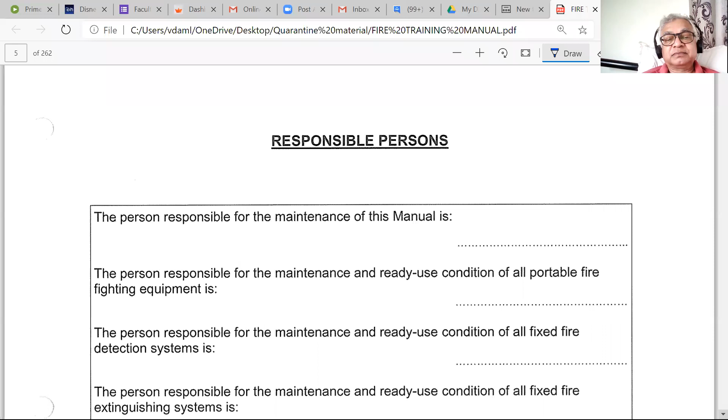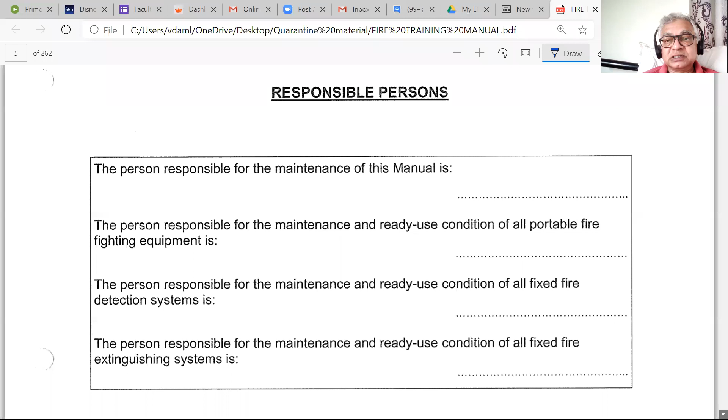Then there is a list of responsible persons. Here you see responsible person for maintenance of manual, then portable firefighting equipment, detectors, or fire extinguishing system, etc. So the responsible person's name must be mentioned clearly. Now don't worry about acknowledgements, that is not normally the person.

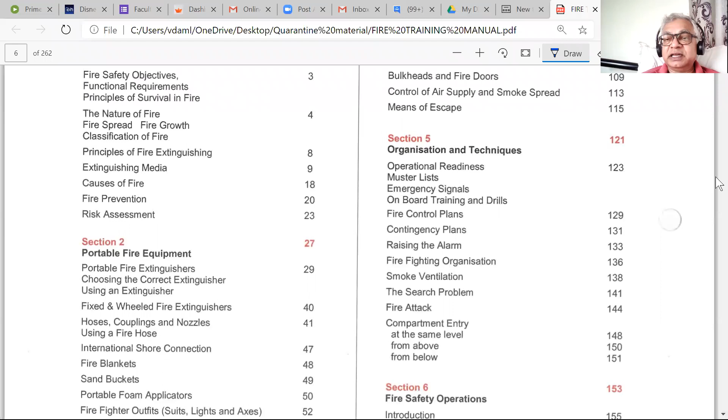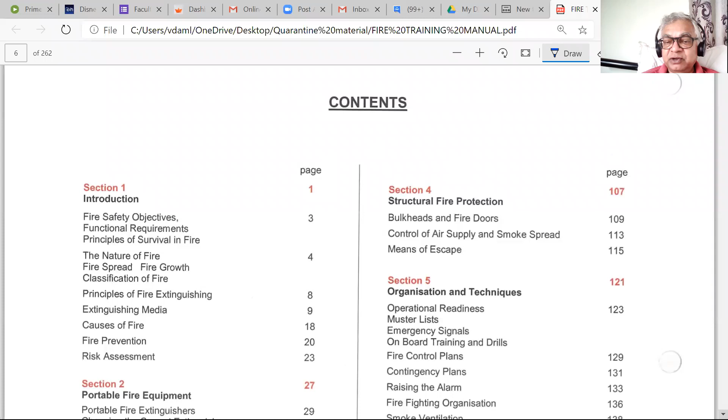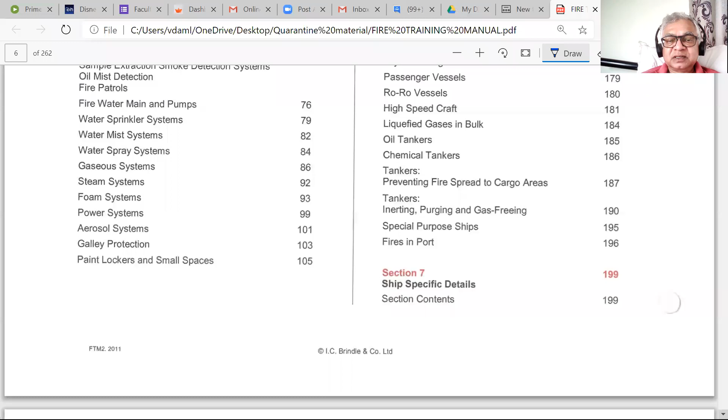Then you have got this index, what we can see here. Contents: section 1, 2, 3, 4, 5, 6. Now this particular manual covers everything quite well. So if you study this carefully, you should be covered around 70%. And then more than that, you have to obviously do a little bit more.

Now the purpose of this manual is to provide all members of the crew with general and ship specific information, instructions in firefighting, meaning of the ship's alarms, operation, use of firefighting systems, etc.

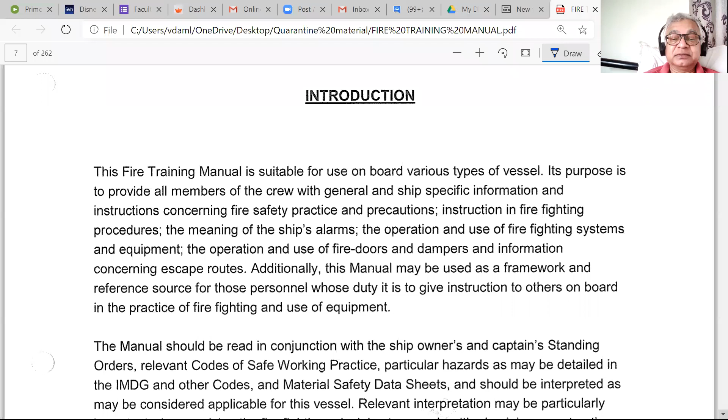Now, this manual is always read in conjunction with ship owner's or captain's standing orders. Normally it will be captain's standing orders, the ship owner thing normally they don't directly involve themselves. So you will have captain's standing orders, then relevant codes of safe working practices, etc. So this is not the only thing to close the chapter, this is one part of the system.

You need to also refer to other books, like material safety data sheets. Now obviously, when you are going to deal with some chemicals, you have to read this. So this is not only for safety, but we are also looking at when you are replacing chemicals, say foam chemicals or something else, all that time you need to refer to it.

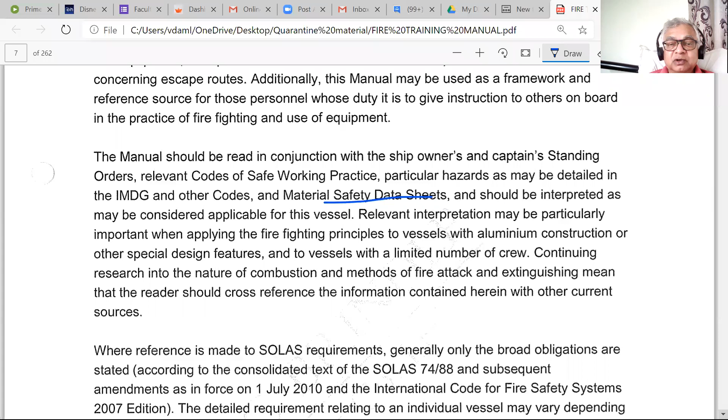Now this aluminum construction and all depends on ship to ship, okay? Because a lot of ships nowadays try to have aluminum accommodation because it reduces weight. But then you have to also be careful about the fires.

Now reference is made to SOLAS. Okay, these dates will change, like this date may be changing. We have got the latest one, something else, but we can accept that some changes will be there.

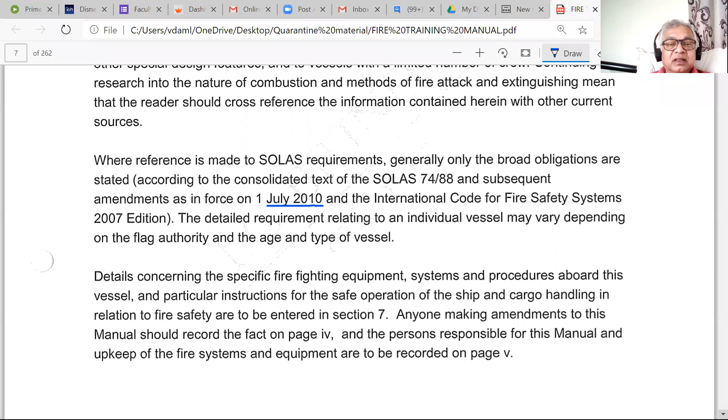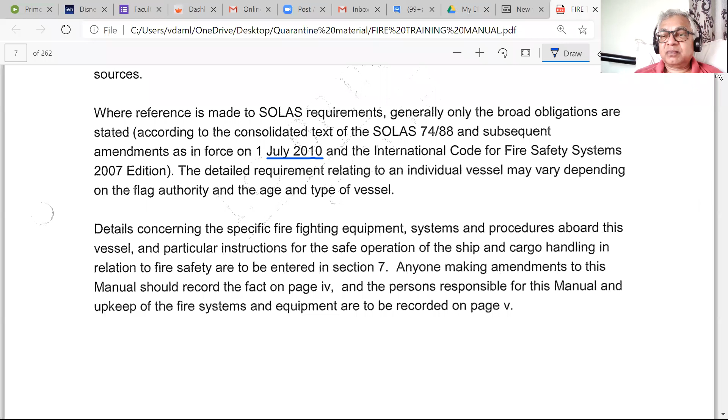I want to see whether my face can be seen or not. So, 75 and 62, if you can switch off your videos, it will be much better, because then I will not get these windows.

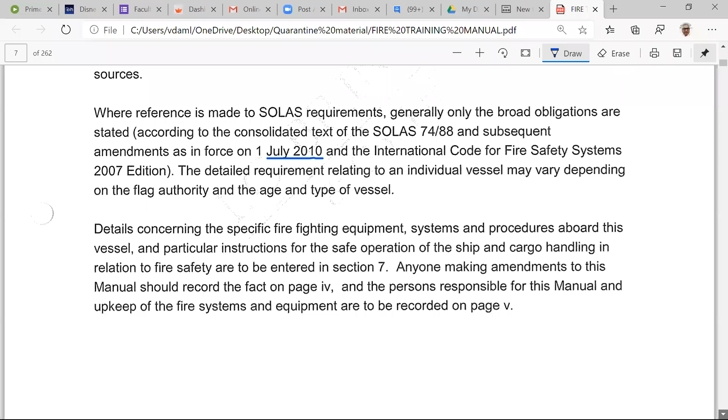Now, all sorts of details, everything are mentioned in, say, section 7. So this manual will have most of the things what you need, and we are going to use it to cover up all our syllabus.

Compliance is always there because IMO has a resolution, and SOLAS demands that every ship must have these manuals, fire training manual, whatever you call it. But there are training manuals which are requirement, they're mandatory. Safety operational booklet, that is part and parcel of this, but it can also be a separate document according to SOLAS regulation 16.

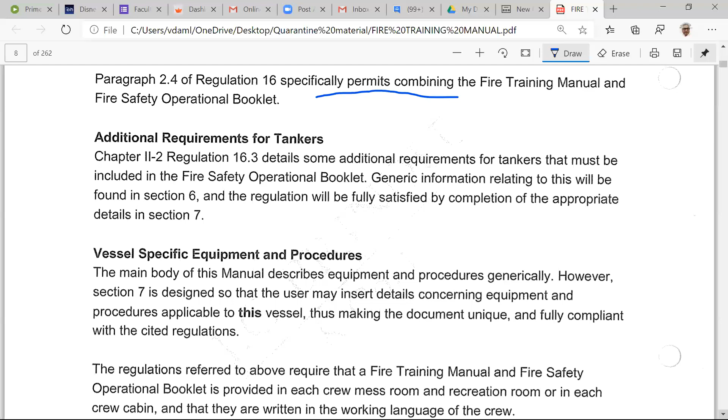And this permits combining. This is a little boring one, don't worry. Then additional requirements for tankers are there. Then you have got vessel specific equipment procedures. So this is important, like this manual is meant for this particular ship. Any other ship, if you are going to use it, you will have to modify it so that it's suitable for that other ship. Core material normally remains the same.

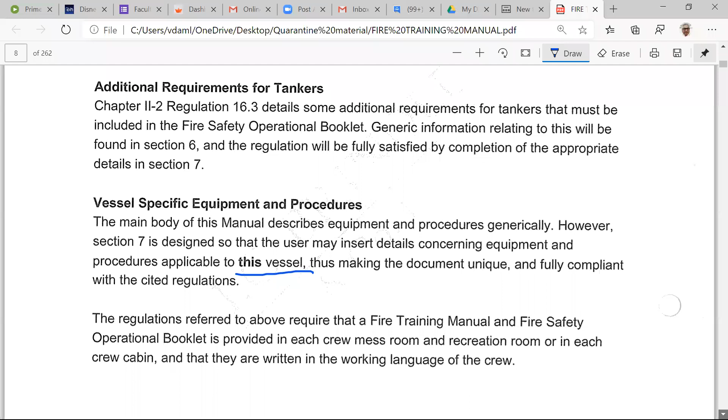Maintained, it has to be provided in each crew mess room, recreation room, and more, in the working language of the crew.

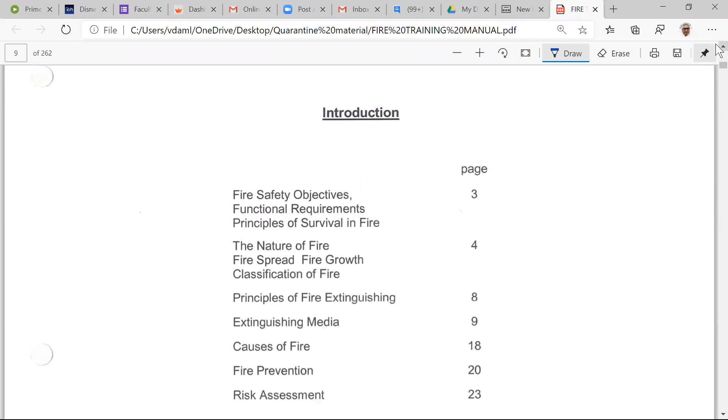Next part, we move on to the main thing. Now that introduction is over, this is what we are going to cover, which all of you have done already, but we will just revise it so that we will have continuity.

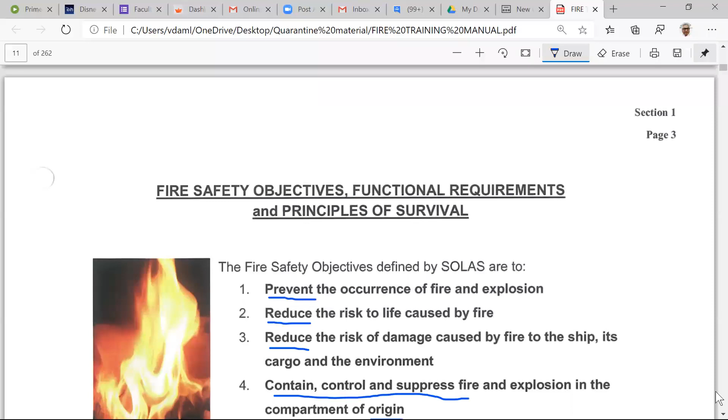Fire safety objectives, functional requirements and principles of survival. This is what we have already done in class. Fire safety objectives defined in SOLAS: prevent and reduce risk of damage, contain, control and suppress fire in the compartment of origin, and provide escape routes.

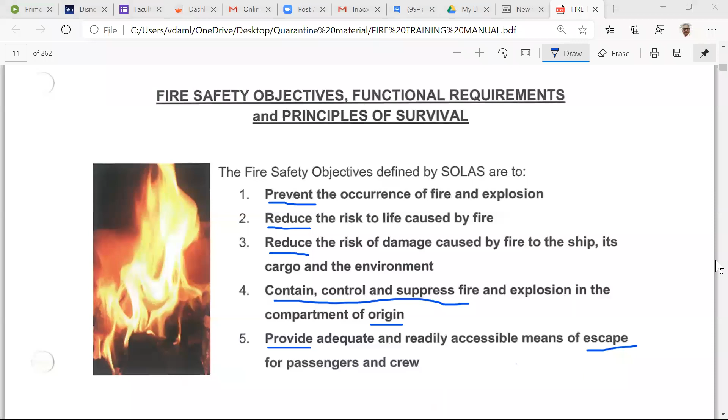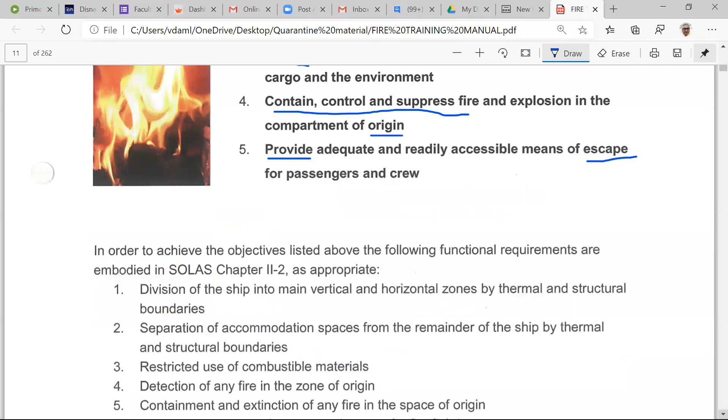Somebody is asking whether the working language will always be English. It happens that some nationalities, Spanish, French, like to have their own language classes. So this becomes a working language issue. If all the crew is from the same place, you may have a different working language. But with certain changes, like special English classes for people joining sea life, maritime English has come in, and after that English has become more and more common.

Now to achieve the objectives, it's like a timetable we make when college begins - I will study like this, I will study like that. Same way we made objectives.

Now, how will you achieve those objectives? One is division of the ship into main vertical and horizontal zones by thermal and structural boundaries - that means we create boxes. That is how you separate them by vertical and horizontal divisions, a combination of boxes. That is how you make a ship. Separation of spaces by thermal and structural boundaries - for example, you don't have cargo under your accommodation at any time. We always separate it by thermal and structural boundaries.

Then we restrict use of combustible material when building the ship. We don't put combustible material unnecessarily around - we restrict it to the minimum required. So we find new materials which will not catch fire easily, and we test the materials before we use them.

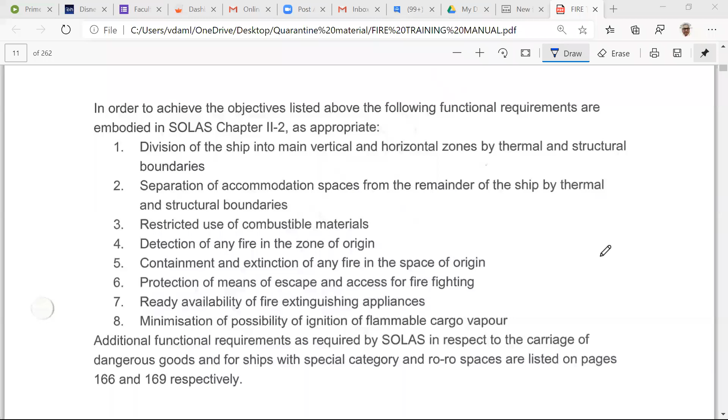Principles of survival in fire. Now, if you have to survive in fire, realize one thing - if something goes wrong at home, in a mall, anywhere else, we can just run out and leave firefighting to the fire brigade. But unfortunately, our problem is we are at sea, there is a ship. Now, in case of fire, how do we survive?

That is why there are points: the theories are there, the practices, then we have to convert into practice and so on. So, knowledge of fire theory, regular training, preparedness for fire emergency, knowledge of escape routes, regular inspections and maintenance, and knowledge of dangers - dangers means hazards.

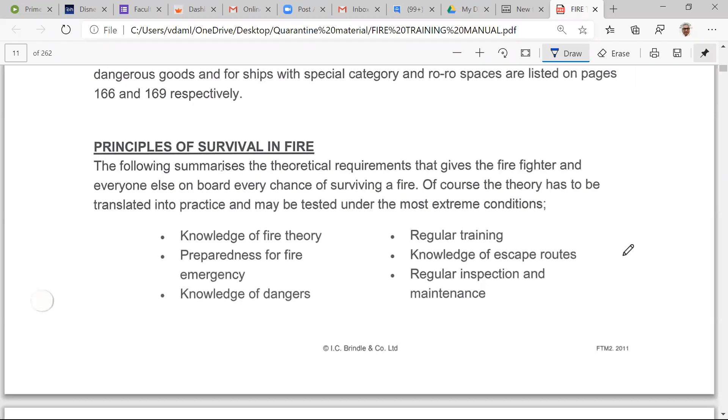Now we start fire. Okay, the famous triangle. Fire is the result of rapid oxidation at elevated temperature. This is a standard definition which you have to know well, in case you have to quote it somewhere.

Now remember, a flame may or may not be seen. There are flames which you cannot see, and some flames we can see. It happens sometimes, like these blue flames and all. And if any one of you has a kitchen with bright light from morning time, you will find it's very difficult to see a gas flame. It happens. So remember, flame may or may not be seen, depending on the flame.

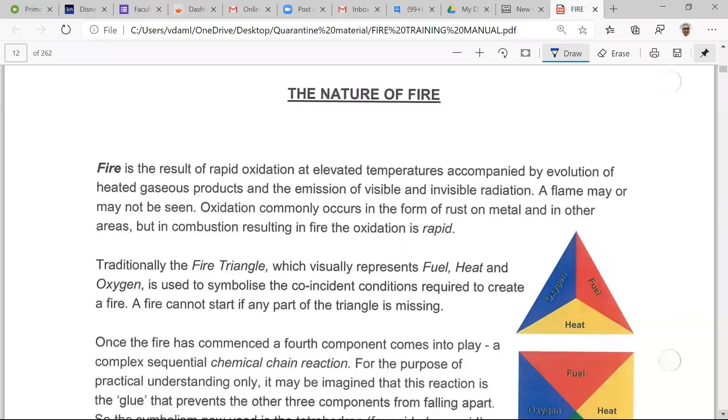Traditionally we used to have the standard fire triangle, which is fuel, oxygen, heat. Now one important thing is fire cannot start unless the fire triangle develops. Remember this wording carefully, cannot start. Fire will start if all three things are together, and if you remove one element, then fire will stop. But the fourth element which comes into play, that chain reaction, is required for continuing the fire.

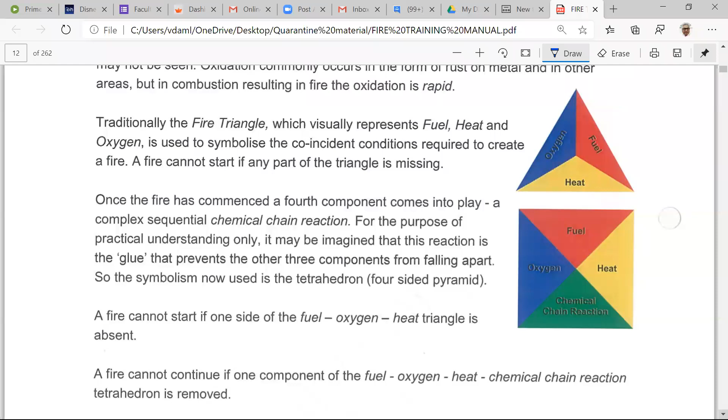It is not about starting. Starting is one part, and continuing is another, because it is possible that if there is no chemical chain reaction, fire will extinguish itself. So continuation and starting are two different things, and that is where the fourth element comes in. I think it should be clear now looking at these diagrams.

Now, if we remove any one, fire cannot continue. So fuel can be solid, liquid, or gas. Anyway, in the end, only gas actually burns. Flammable material, when heated, gives flammable vapors. Vapors are gas, so that is what burns actually.

Oxygen is always there, unless you create a specific place where there is no oxygen, but you always have oxygen in normal places. Heat is not just anything, it has to have a critical temperature, because heat is a relative term. So you need a critical temperature. For certain objects, they may catch fire at say 100 degrees temperature, and then there are others who will need 600 degrees. So it depends. Critical temperature is important.

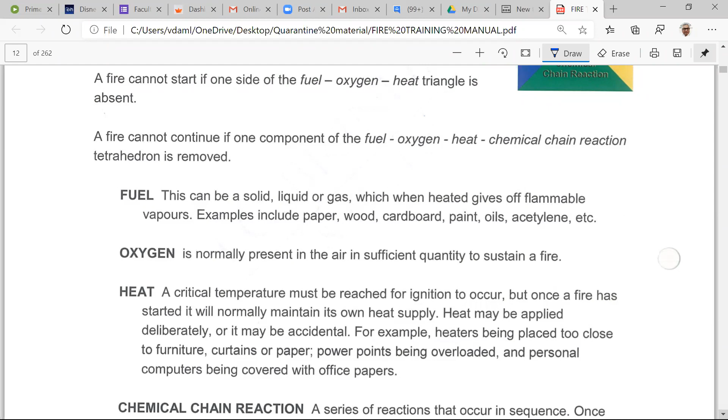Chain reaction. Once this chain reaction starts, it keeps on providing energy. It's like, if somebody is smoking, because the cigarette is lit, that heat keeps on passing and there is a chain reaction, so the cigarette keeps on burning. That is exactly what happens.

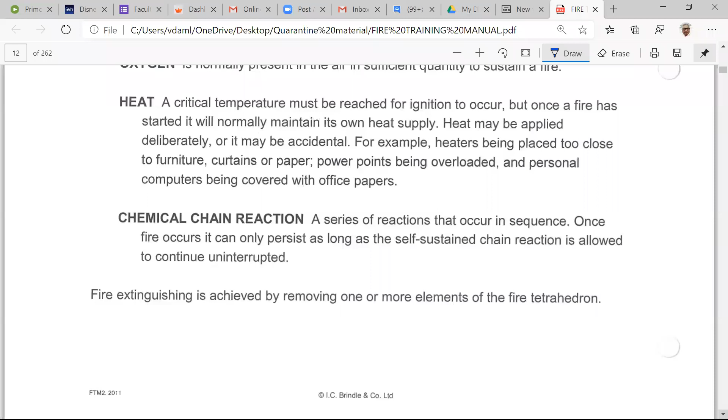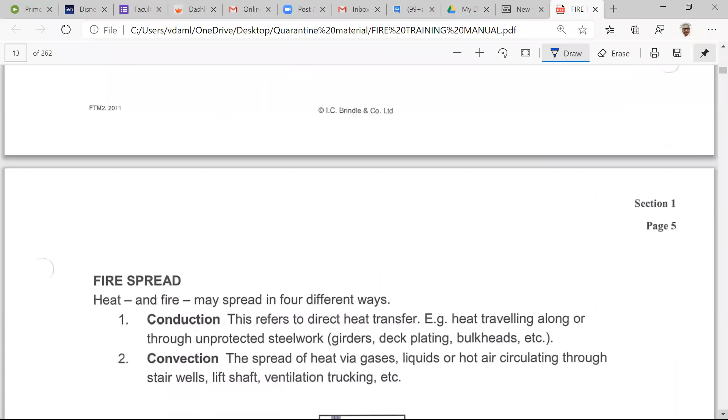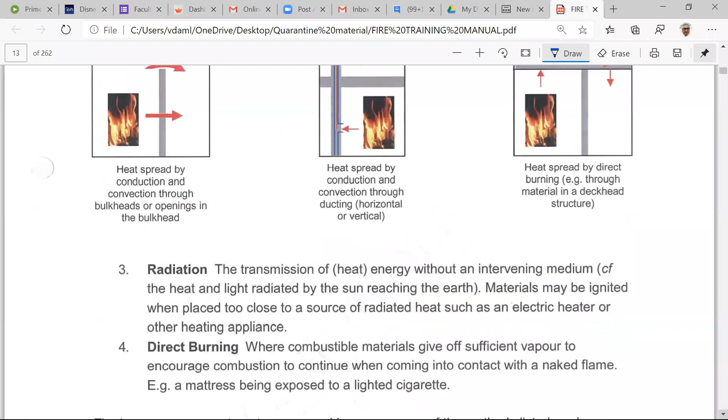You can remove one or more elements from the tetrahedron to stop fire. How fire spreads: standard things, conduction, convection - this is all something you have done in the past. Radiation - that is the way we get heat from the sun to earth. Direct burning.

Mattress - so it keeps on burning itself once you start. Fire can spread from 6 sides. See, every cube has got 6 sides, so a cabin, or any compartment, has got 6 sides. So it spreads from 6 sides, and there is heat inside.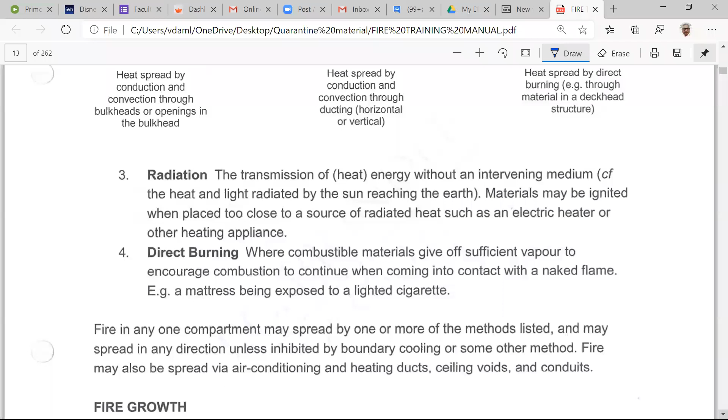It's like you're handling a fixed box. There is heat inside, and one method is you want to cool it - boundary cooling. Boundary cooling means try to cool the box. So there are different things which will happen. But remove any one of the things, and you can stop fire.

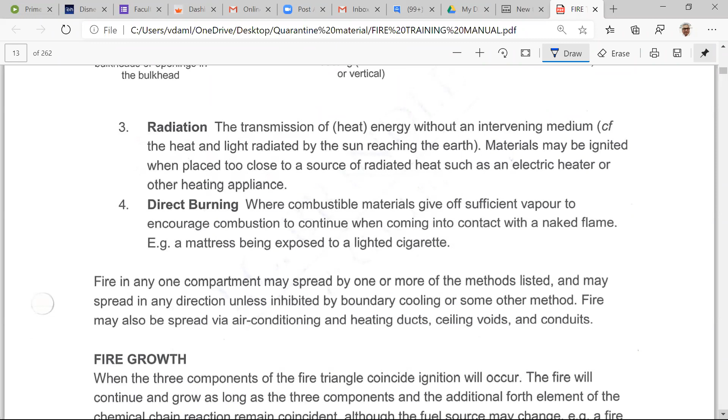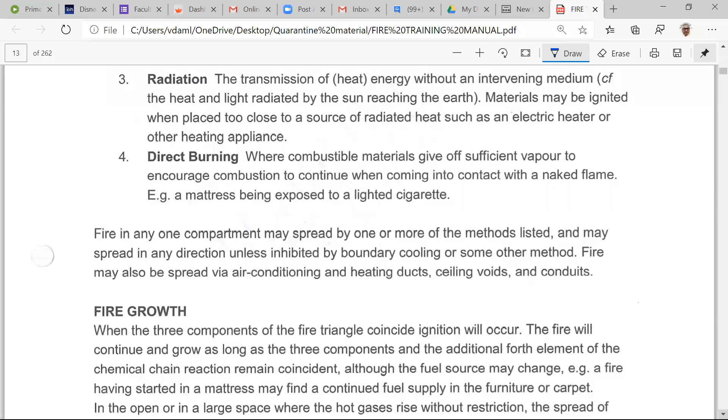It will spread by these 4 different methods, and it will spread by 6 sides. Plus, there may be additional stuff like heating ducts or air conditioning ducts, because from there it will leak out. That is the problem - it leaks out and goes to some other compartment because there is a common connection.

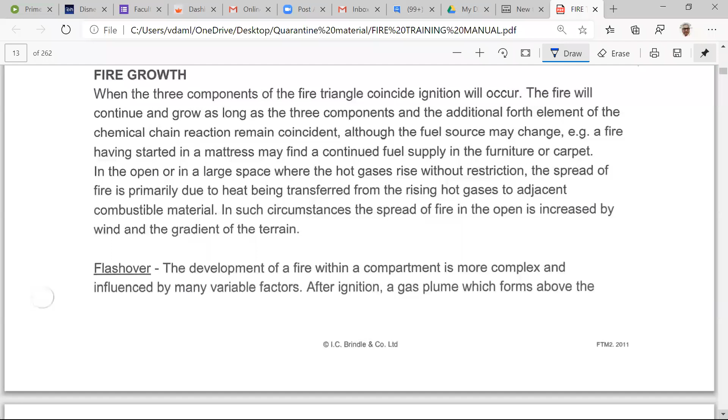Fire growth. Fire, well, anything that keeps on feeding it - it's like, if I just have 1 kilo of something, a paper, I burn it. Fine, so far as that 1 kilo is available for burning, it will burn out completely. Now what happens? It may need 10 minutes to burn. But suppose the oxygen increases, like there is a wind, it might burn in say 5 minutes. So this is how it spreads, and growth is spread - how it is going to spread. So we try to restrict all these things whenever there is a fire.

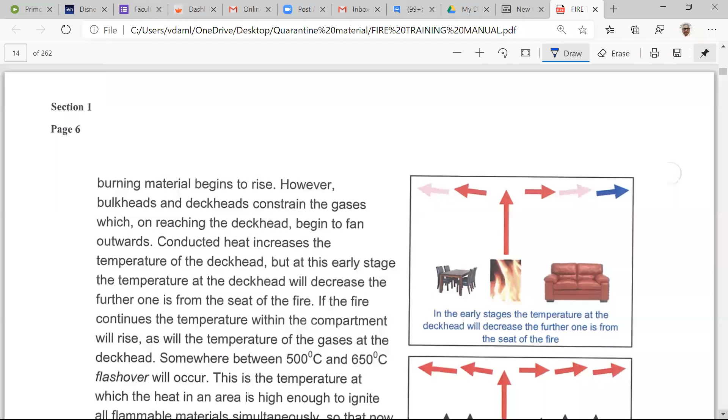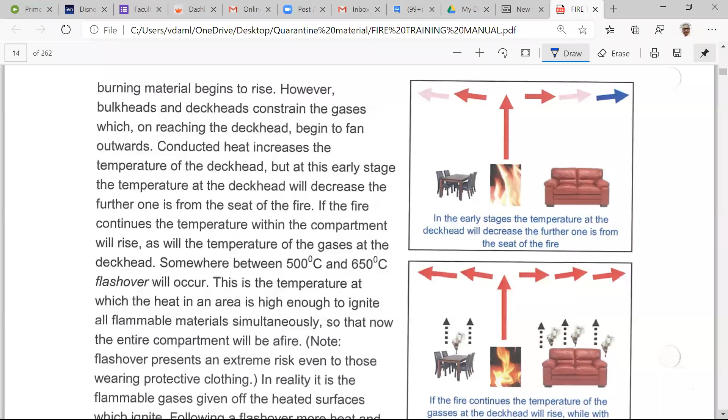Flashover is something you must have done when you did this firefighting course. You think you extinguished it, and then you put water and it restarts again. That is flashover. The pictures are here, you have to read them.

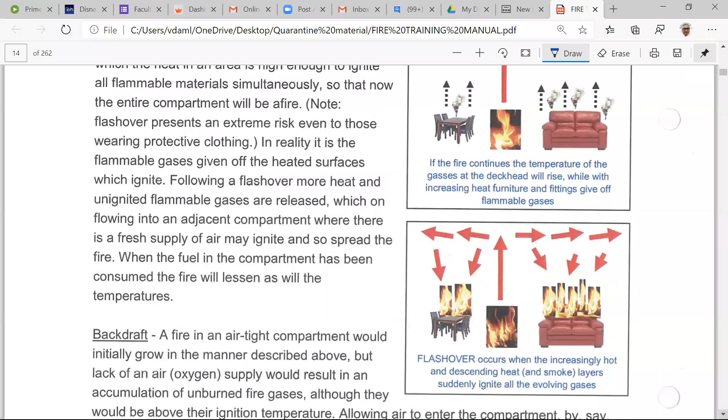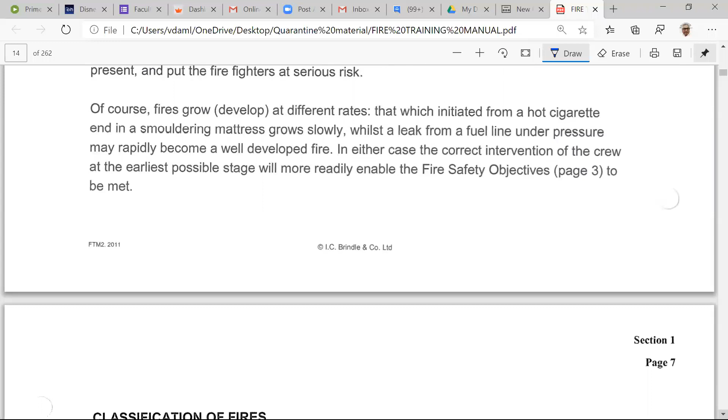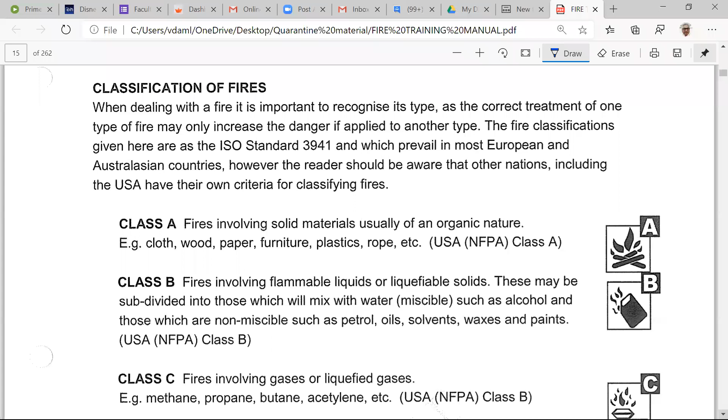But the more important part starts here now. Classification of fires. There are different classifications of fire - ISO standard that Europeans use, India uses, USA as usual have their own criteria. But basically what IMO is looking at: class A, solid materials, class B, liquid materials, class C, gases.

Class D, powdered metal, metals, etc. And then we have class E sometimes mentioned, but that is electrical fire, where it is separated only for one reason, that electricity doesn't catch fire.

Material, you say, has to be solid, liquid, gas, or metal. So we are going to repeat it and say electrical fire, generally when it is mentioned anywhere, the problem is electrocution, the live circuits. That is the problem, because when you start extinguishing it and by mistake use water, one end of the water jet may be on something burning which is live, and the other end is in your hand. Electricity will travel and you will get electrocuted. That is the reason electrical fires are mentioned, but actually what is on fire will be in class A, B, C, D.

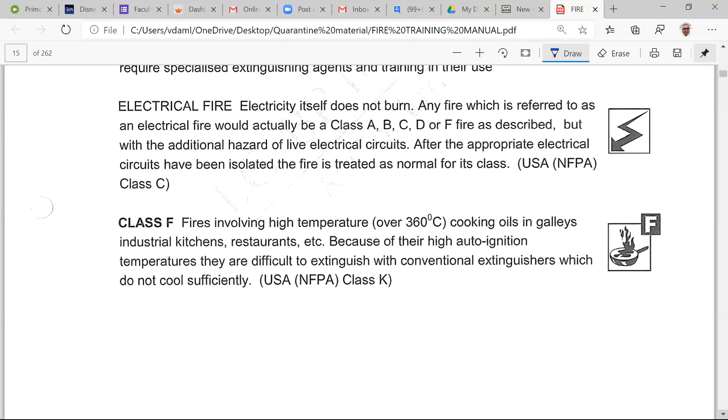F was also added, F or K, added because cooking oils in galley at high temperatures. When we go to restaurants, we also have some fancy dishes like sizzlers and all, where you get food in front of you which is on fire, and also in pubs you have drinks where you drink fire. Those ones are harmless types, but cooking oils can catch fire. If you watch professional cooks cooking, you will find sometimes their frying pan is on fire and they are actually cooking with it. This is where class F was added, cooking oils and galley fat can catch fire, and there is also a danger of transmitting it to other places through the ducting.

Now, principles of firefighting. Like we saw, fire cannot start unless you have got fuel, oxygen, and heat there, and it will not continue unless there is a chemical chain reaction. Now we will see different methods of extinguishing fire.

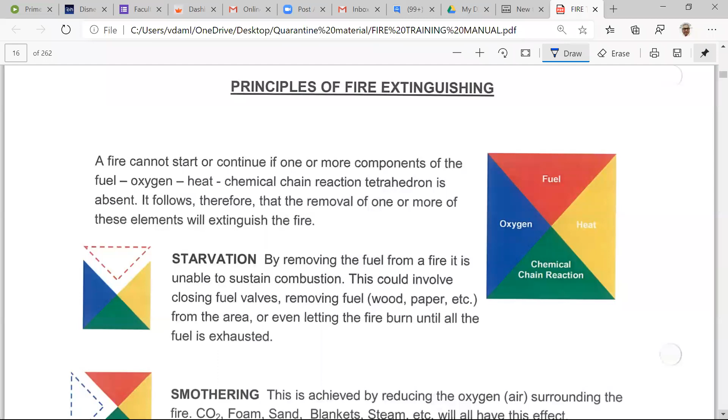One is starvation. What is starvation? Now you look at the right hand side figure and the left hand side figure, this one and this one. We are removing fuel, so we are starving it of food, that is fuel.

Smothering by reducing oxygen, because you need a minimum percentage of oxygen for fire to continue. So if you reduce that, fire will extinguish itself. So what we do is smothering - we try to cut off oxygen, we try to reduce oxygen, and that is what is smothering.

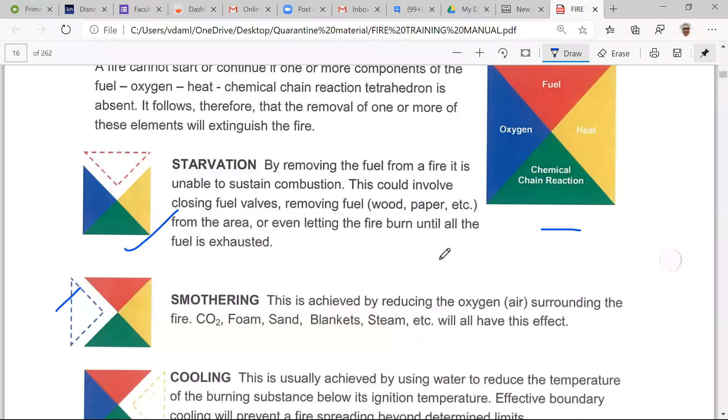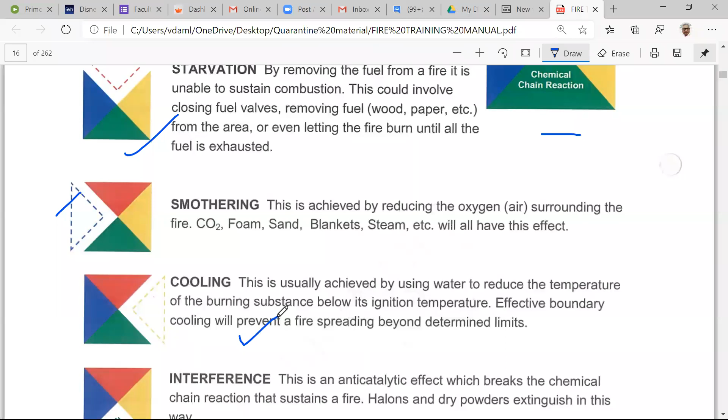Then we have the next one, cooling, means we remove the heat, the yellow element, heat. Cooling means, you see, 100 degrees temperature in fire is low - that will come down to normal temperatures anyway, but 100 degrees is low. Fire might be having temperature of 600, 800, 1000 degrees. So cooling means even if you dose with water, it starts cooling. Basically, it is water.

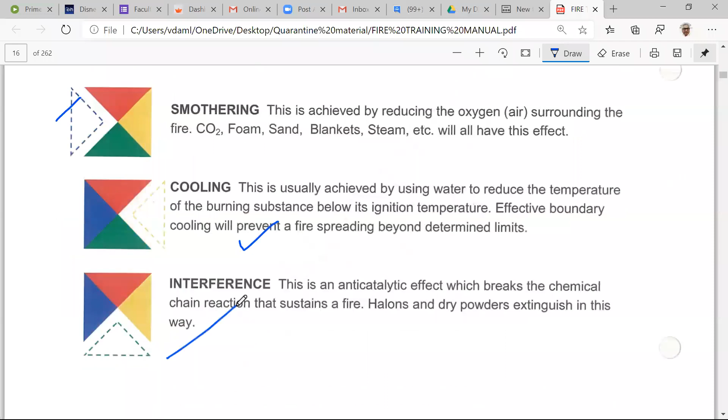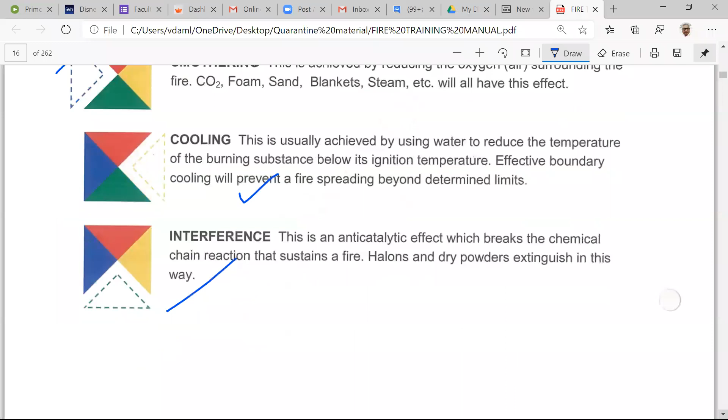And then the last one is interference, that is where we break the chain reaction. We break the chain reaction, and that is interference, and that is how we extinguish fire - that is, halons, though not used anymore, and dry powder extinguishers.

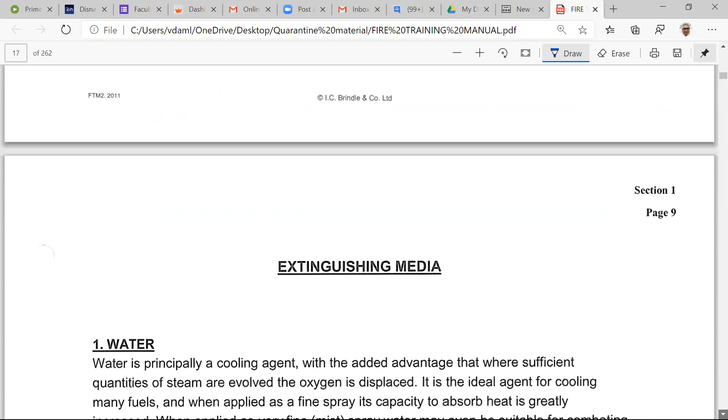Now we come to another very common thing for exam questions like, okay, what is water? Water is a cooling agent. Why do we like water? Because it's floating around, available all the time, and you don't have to worry much about it. What is the best quality of water? When you use water, the latent heat of evaporation is the main key, because when you use water and it converts into steam, it means it is really efficient. And once the heat comes down, it is easy.

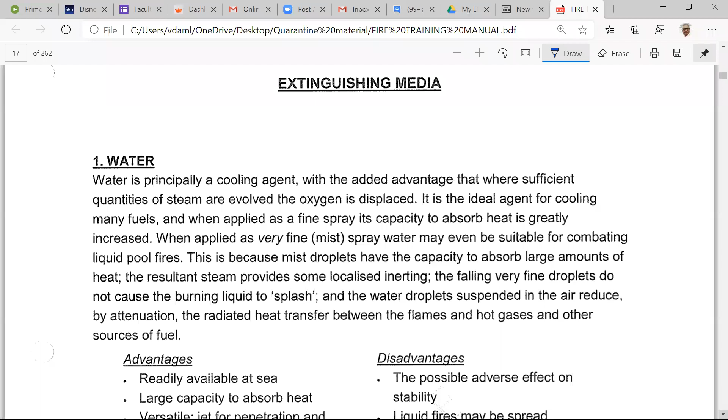Other one, general, that's why we like fine mist. Now you have different types of them. Advantages: readily available, large capacity to absorb heat, versatile - jet, spray, boundary cooling, cooling large areas, etc. Chemically stable, does not deteriorate.

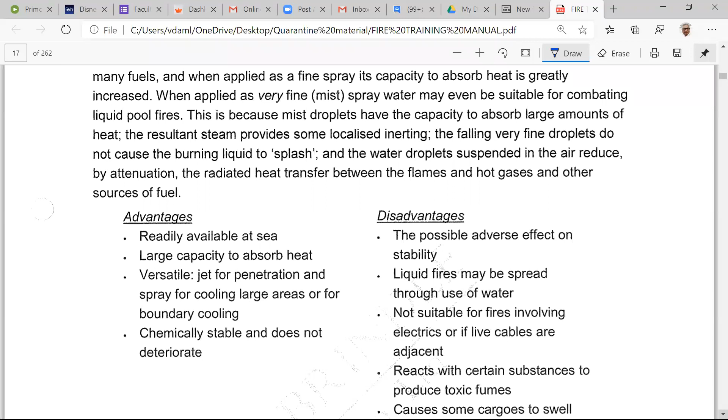Now, disadvantages, those are the bad ones. Possible adverse effect on stability. Why do we say possible adverse effect on stability? Because one thing is it creates a free surface if it is accumulating anywhere on the ship, and secondly, if fire is on top, you are adding weight, and that extra weight may be unsuitable for stability.

And you realize one thing, when we did the FSS as well as the SOLAS, the bilge pumping capacity has to be higher than the fire pumps, so that you can drain out all the water all the time and avoid this effect on stability. Now the problem with liquid fires - water and oil don't mix, so oil may spread if you use water on liquid fires.

If there are electrical and live cables around, and you use water, seawater is a conductor, so it's going to create bigger problems. You may get electrocuted.

Water can also react with certain substances to produce toxic fumes. This is possible. In fire, generally we may not know exactly what is happening, because generally it is cargo, and every material can have different reactions.

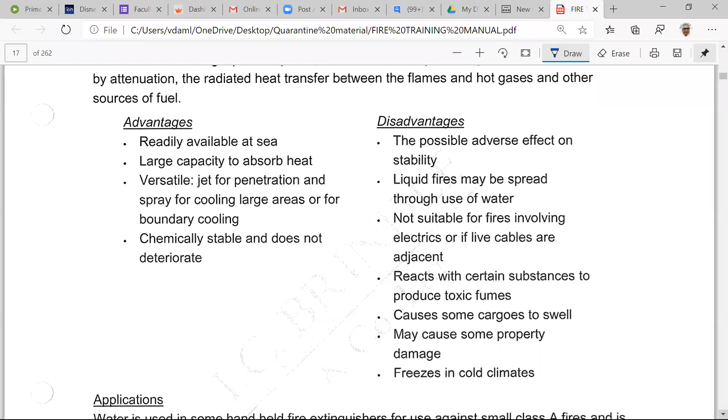And then comes something we generally don't anticipate - it freezes in cold climates, so it may not be efficient. Normally what happens is we take seawater, so that is okay. But suppose your ship is stuck in ice, you may have a problem getting water to fight fire.

Since water is friendly and has advantages, one method is using pipelines and hoses. The other is we store it in fire containers, fire extinguishers - you have about 9-10 liters of water available to fight fire. Those are water extinguishers.

Then you have sprinkler systems depending on the type of ship. Different types of spray systems are there, basically for cooling - any spray system of water is for cooling. Ro-ro ships have this. Most engine rooms today also have hypermist systems as an extra system. CO2 is there and hypermist is there. So that is how it works.

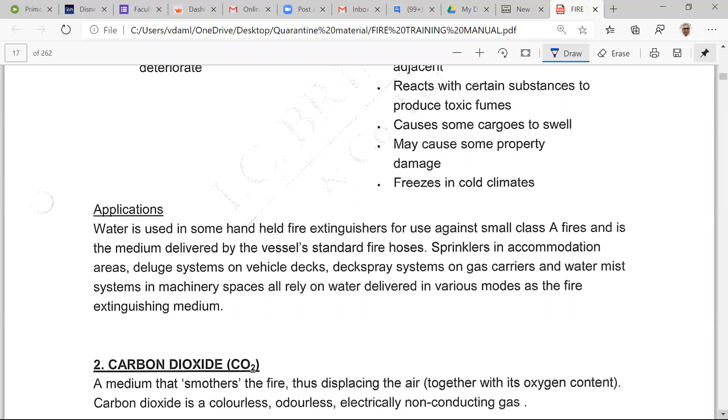Next comes - now we saw the liquid one, that is water. Carbon dioxide. It smothers the fire by displacing oxygen.

Advantages: it's inert, electrically non-conductive. Now realize when we say electrically non-conductive - electricity does travel through gases, and that is how modern electronics started. First valve sets used to be there, electricity used to travel through gases, so at that time the gases were conductive. Just remember that carbon dioxide is non-conductive.

Now water you have plentiful because you are floating, but CO2 obviously you are going to buy and keep it. So we have CO2 in limited supply, because when you made the ship, you created some space, you worked out calculations - in case of fire, I can have this much. But if you finish it, you don't have extra available.

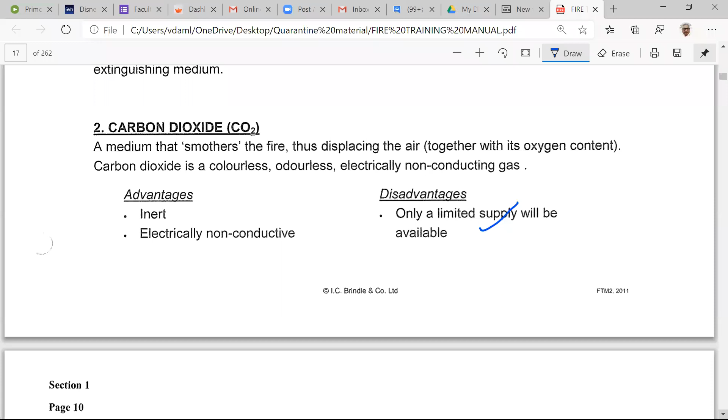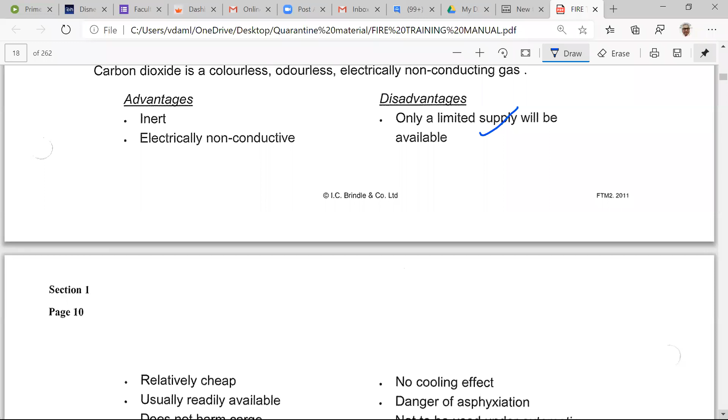That is the same story. You know what is happening today. You know what happened, no? Guys finished with cigarettes and booze. So limited supply was available.

CO2 is relatively cheap because it is also used in other industries, available because it has a lot of other uses. Now since it is a gas, it will not harm cargo - it is an inert gas. It doesn't form toxic or explosive gases.

Now see, what we are using is CO2, and with normal fires it is not going to react with the fire, except its job is to remove oxygen and replace it so there is no oxygen available. The possibility is always there that CO2 may react with extremely high fire to make carbon monoxide, but that is beyond the scope here.

It does not deteriorate in storage - it has a long shelf life. It's not like when we buy medicines and there is an expiry date, so it doesn't have that type of expiry. Again, it is in use for a very long time, so there is established technology.

It's effective on deep-seated fires. The thing is, when we use CO2, we don't have to go near the fire - we are releasing it from somewhere else. Unlike if you are using a water hose, which means you have to approach within say 15, 20 meters of the fire, with CO2 you are doing it from a remote place.

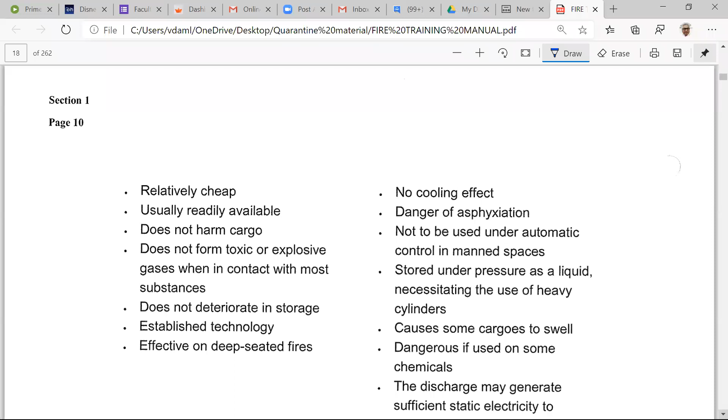Some cargoes may swell, but normally I will not go so much into that. But for an answer, one can say that.

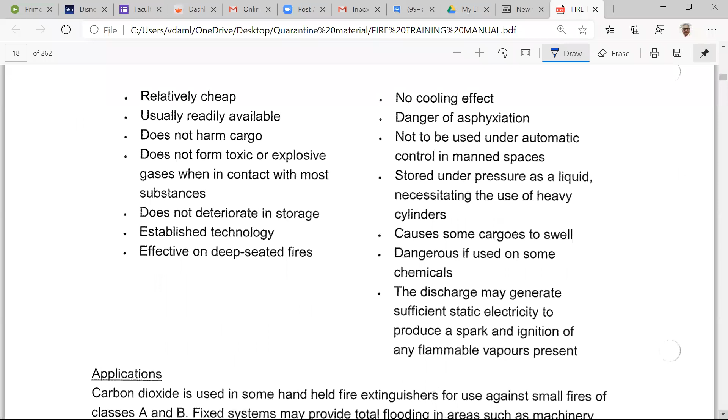CO2 is dangerous if used on some chemicals, because CO2 can react with chemicals. So normally when you are loading specific cargoes like chemicals, you get instructions on how to fight fire. At that time you have to cross check whether your CO2 system is approved or not. Not right now for you, but this is what chief officers have to do when they get specific cargoes. They have to check that the ship has a suitable firefighting system for that type of cargo.

Discharge generates — I will not even say 'may', it generates — sufficient static electricity to produce a spark and ignite any flammable vapors present. Now this is one important point.

We don't release CO2 unless there is a confirmed fire. Because if it is an explosive atmosphere somewhere and you release CO2 through the nozzles, there will be ice, because CO2 is liquid, it is going to come out as ice particles, and the ends can get frozen.

As you remember, on CO2 extinguishers you have a handle which is insulated, for the same reason — it becomes extremely cold and starts icing. At that time static electricity will be generated and a spark may happen. So if you release it in flammable vapors, you will actually cause an explosion. So you never use it unless there is a confirmed fire.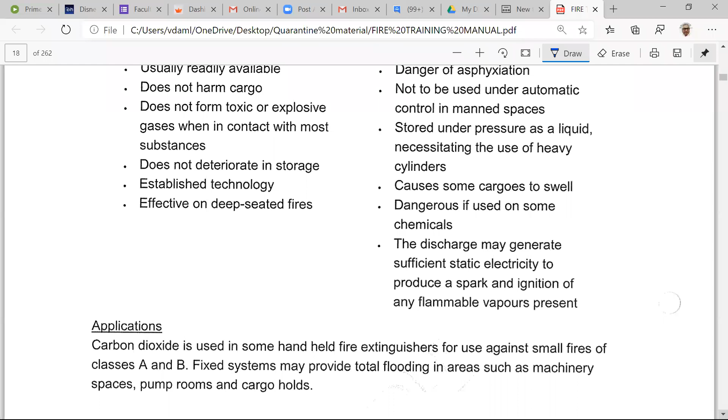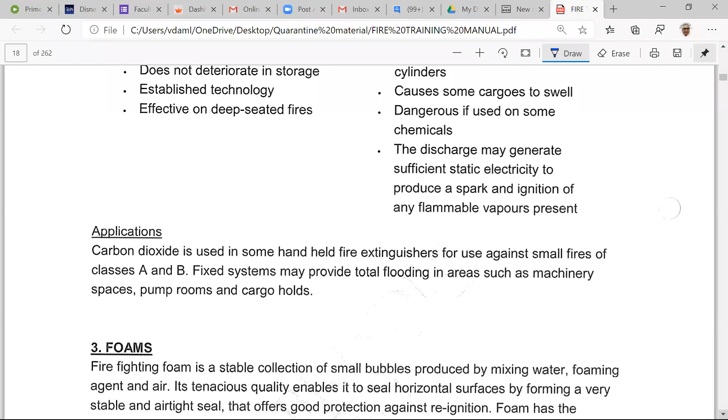You have handheld extinguishers for small fires, but CO2 extinguishers are never used in accommodation because of this danger — asphyxiation. That is why they are not used in accommodation.

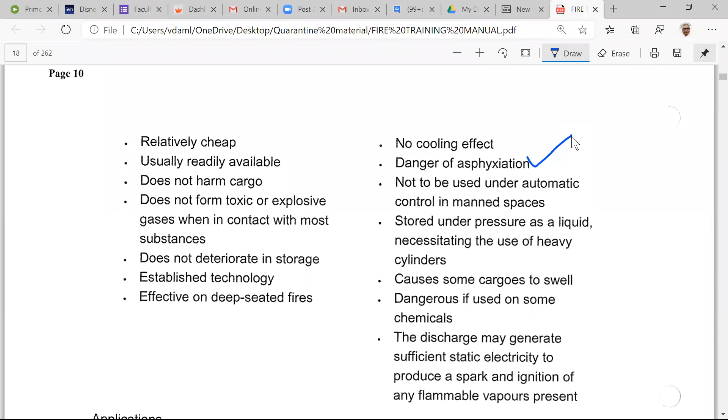The only place you will find CO2 in accommodation, if at all, is in the galley. Otherwise it will be in machinery spaces, cargo holds, pump rooms, etc.